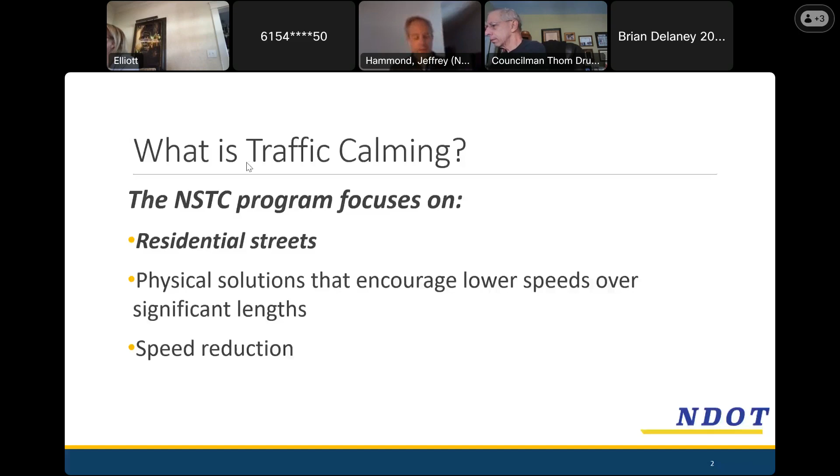We know that this is not the only way to slow traffic down, and we try to work in concert with a bigger objective, and that is some of these other E's. We call it an education aspect, whether that's a public service announcement or something like that. And we do have some tools that deal with education. I'll show you those in a second.

An enforcement approach - a lot of people will say, well, can't Metro just park a cruiser down here and write tickets, and that would help. And I agree, it would help, at least for the time that they're there. But we all know that MNPD is out there doing very important work and doesn't always have the resources to put to traffic enforcement. And that effectiveness kind of wanes over time - the more you see the cop is not there.

One of the reasons we focus on the engineering part - that's our part. That's the engineering, the infrastructure, the right of way. Those are things that NDOT controls and that we're able to bring about a change with. One of the reasons we like to point to about why we do this program in the first place, aside from just being a quality of life issue and sort of an inconvenience, is it really can have real safety benefits.

I don't know how much you walk on Leake Avenue. I know most of the streets, very often when someone applies for traffic calming, part of that reason is because they don't even feel safe walking down their own street, maybe even don't even feel safe walking it into your driveway to get the mail.

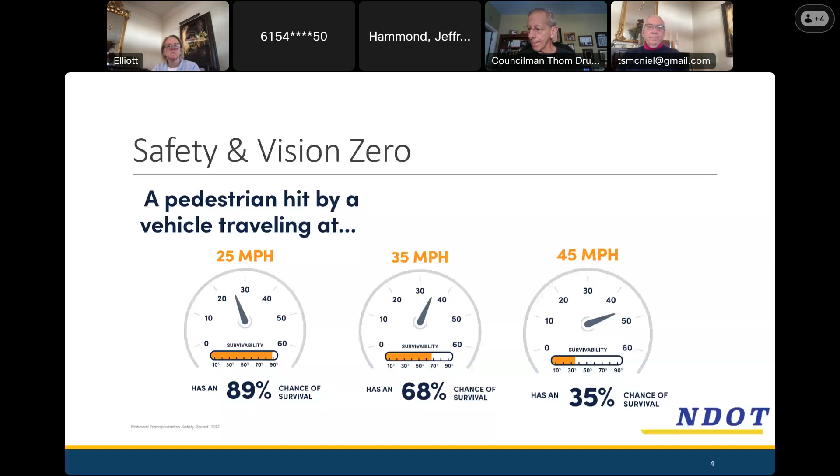There's a lot of people in Davidson County who are living with some of the inconvenience and some of the safety concerns that you all may have been. And so it's just a big number. To deal with that, we typically have been funded and working to do about 50 streets per year in 2 different application windows in the year. But in this past year, there was some surplus budget money, and council saw fit to allocate a portion of that to additional traffic calming projects.

So just in response to the overwhelming outcry for some of this work, this year we're doing 85 streets - still a small part of what is being requested, but that's a lot of neighborhoods to be working in. And so we're trying to expedite that project and get some of these projects on the ground as efficiently as possible.

Sometimes when we come to these meetings, people will say, well, can we have more stop signs, or certainly you'd like more sidewalks and those types of things. This program is pretty defined in terms of what we can offer, and we don't offer those types of things, but there is a way to go about requesting that. Those are very reasonable requests, and the best place to start those is Hub Nashville.

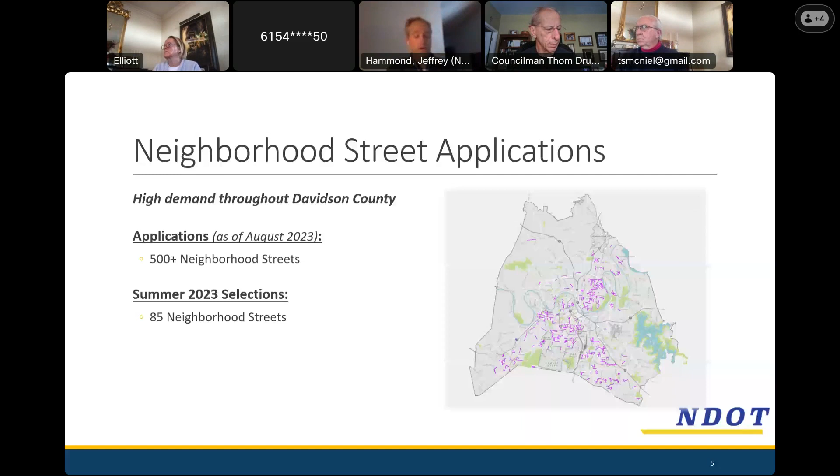If you're not familiar with it, it's a great resource for us residents of Davidson County. You go to hub.Nashville.gov. You can also pick up the phone, call 311 and talk to the operator there. This is not just transportation or NDOT requests - just about every metro department is represented there, and so it's a great place to log those requests. You get some feedback if they get it to the right people in the department, and it's a very efficient system. So we always like to plug that.

Back to how Leake Avenue got inducted into the program. This is the scoring system that we use. As I mentioned, it starts with the application request, and then we go out and actually take data on every one of those roads that are requested.

70% of the score comes from the type of data you'd probably expect: the amount of traffic on the road and the speed that traffic is moving. Altogether, that's 70% of our priority score.

The other 30% have to do with some of those other road users we were mentioning. If you have bike lanes on the street, your score actually goes up a little bit. You guys have sort of sidewalks, sort of not - you've got that asphalt path along a portion of Leake. So your score generally went up because you don't have good pedestrian accommodations compared to some of the other neighborhood streets we work with.

Your score also goes up if you have what we call trip destinations - are you close to a school, a park, transit service, or other shopping destinations that may warrant additional pedestrian use? You guys have Palmer Park right there, and that really helped boost your score because we recognize you have a nice attraction like that, people do want to walk to it, and we try to prioritize those streets because of those considerations.

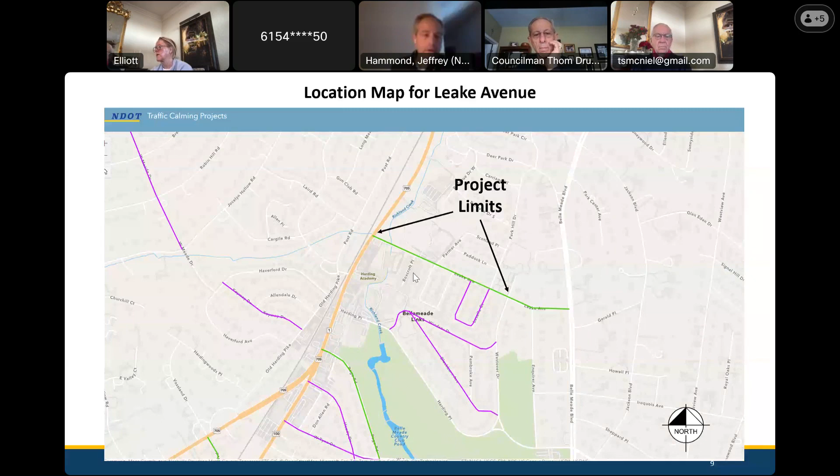I want to switch now and talk about some of the tools that we use, starting with this one I've referenced a couple times already: speed cushions. It has become the bread and butter and almost the sole tool that we use in this program, and that's for a couple of reasons.

They're a very known commodity to us. We order these from the same manufacturer for every street we do in Metro, so we know what we're getting. These are fabricated, not a site-built product — it's recycled rubber that they build to specifications, and we order those, they ship them, and our contractors bolt them down. That means they're very uniform and consistent. I can give you a street to go drive, and it will be the exact same product you're seeing on that street, so there's no question of what we're going to be receiving.

They hold up well and stay looking good. We've had some of these out for close to 10 years now, and they still look good and remain effective. We know how they track — there's not a lot of unknown about what we're going to be dealing with. We've been using these for a number of years now, so we're pretty comfortable with their performance in various aspects. Just a little information about what you're looking at here.

Speed cushions, as the name implies, are small and kind of modular — they look sort of like pillows laying down, I guess that's why they get that name — with a gap in between. That gap becomes important for some of our road users, our emergency responders who usually drive larger wheelbase vehicles. They can't straddle these, but they can get a little closer. The fact that there's a break between these cushions, as opposed to one big continuous piece across the road, which I'll show you in a minute, makes this our go-to product unless there's some very special circumstance — because of the lesser impact to emergency responders, fire trucks, ambulances, and so forth.

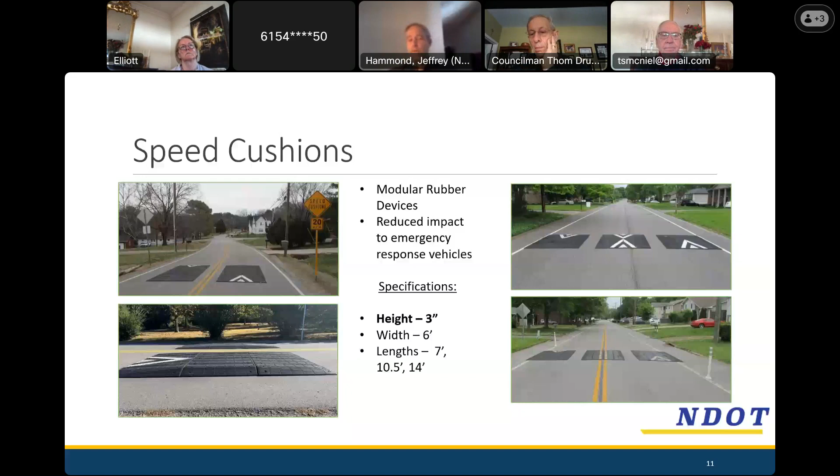We're not going to put these on a steep hill, or even a sharp curve. If there's a curve you're coming around, we don't put these in curves. And some streets have one driveway after the next, and we never want to block somebody's driveway with one of these. It's not dangerous, it's just kind of an inconvenience. Nobody wants to pull in and out of their driveway and have to navigate a speed cushion while doing that. So we steer clear of driveways, and sometimes it's very difficult to find a place where the density is much higher than it is in your neighborhood to situate those. In those kinds of cases, we'll supplement with a feedback sign instead of speed cushions.

So it helps. There's a little bit of before and after data on this as well. We're finding it does have a pretty good impact, especially in the short term. I think the jury's still out about the effectiveness of these over a longer term, as people get used to seeing it.

Yeah, Jeff, you just probably hit it as I was going to ask you a question, but from what I've heard from you and others, it's only a short-term solution. So if you have one up like on Davidson, people respect it for the first 6 months to a year, and after that, people forget about it. If that's correct?

Yeah, that's kind of our theory right now. We're still collecting some data. Some of these will actually record data for us, so we collect data and see if people seem to be abiding by it.

We're still collecting some of that data. People really go both ways. Some swear by them and say it absolutely helps. I can tell you it helps, I slow down every time I do it, so I assume other people do too. Other people see these and say what a waste, nobody pays attention to that. We hear both opinions from neighborhoods where these have gone in, so we're trying to let the data speak to it. But we can say that if we can put in a speed cushion, we would rather do it. We know it has an effect. This may or may not be a good supplement, but may not be a great total solution.

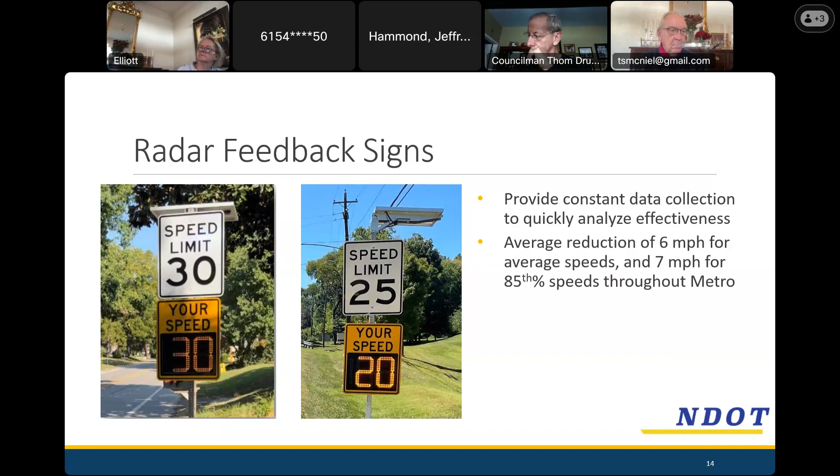Through the website you can request the deployment of one of those speed trailers. They pull it up and put it on the side of the road, and it does very much what the radar feedback sign does, but that's all it does. It's not taking anybody's picture, it's just feedback. It can be deployed, but it's not quick because Metro has about half a dozen of those they can put around the county at any one time, and the wait list is still months long, four to six months last time I checked.

So that is available, but we don't typically go out and put in a ground mount sign. That's a solar powered sign and it takes some time to do, so we don't typically use those as a temporary measure, but more as part of a permanent installation.

Jeff, can I ask a quick question, just for budgeting purposes? How much are those signs, and is NDOT going to request any more of them? I see we only have a half dozen. Sorry guys, I don't want to distract from this project, but if they're of value and we only have six, one of our top priorities is slowing down.

If you could send me a note on the cost and what you think would be of value, when we get through the budgeting process I can talk to Diane Alcorn and see if we can get a little bit more. I appreciate your help on that. For Leake, for example, if we could have put one in during the diversion process we went through for the summer, it could have been pretty valuable, but we had to get TDOT to help. Anyhow it was a mess, but having that would have been helpful, and I know we were short on them, so that would be helpful. I'll try to round that information up.

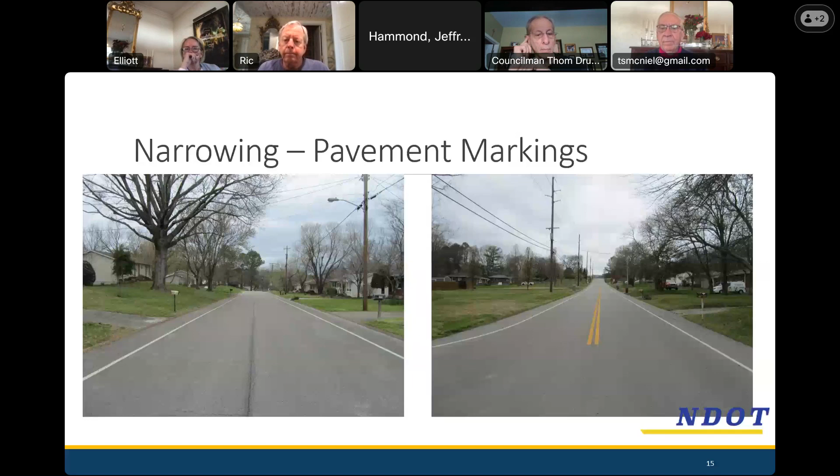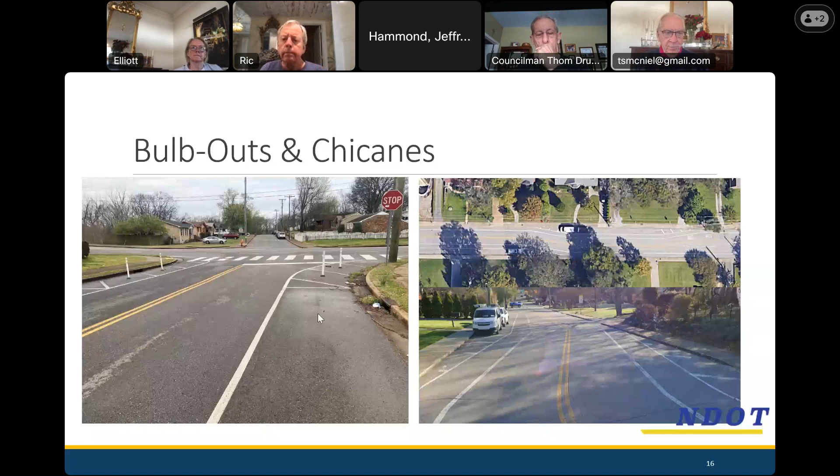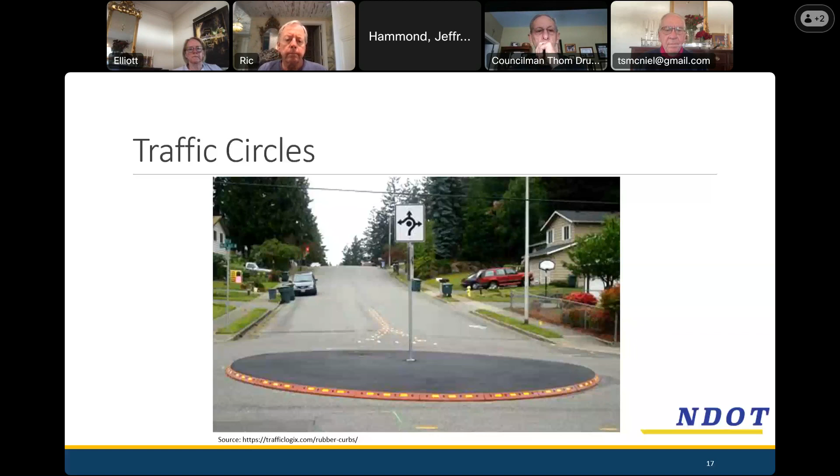Then we'll divide that by what we want the spacing to be. What we've found is if we can space these sets of speed cushions somewhere around 400 feet, 300 to 500 feet in an area like this, that gives us a really good slow progression of traffic. It's not so close together that it's obnoxious or overdone, pushing traffic to another street, but not so far apart that someone slows down for one set and then steps on the gas to get to the next. If we space them in this range, traffic will slow down for the first one and then stay slow because they see the next one coming, with no sense in speeding up just to get to it—giving a nice slow progression of traffic from one end to the other.

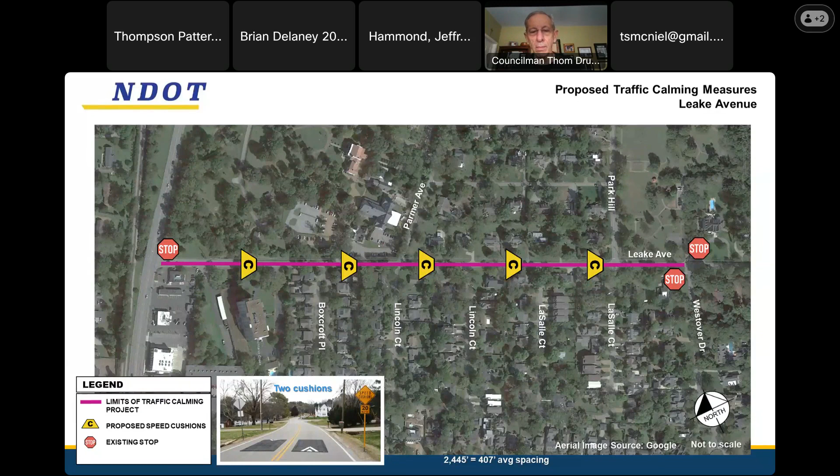Not for me, this is Rick Miller. I think probably one of the most important things is having one as near to Harding Pike as possible, because I live on Boxcroft, and I can assure you that by the time some cars get to Boxcroft, they're already doing 50 miles an hour. So stop them early. I'm looking at the layout right now on the overhead that you sent us, and those spacings look pretty good, where they are, in general. So to me, they do.

Okay, thanks Rick. I want to, as we're solidifying this and maybe not have a second meeting, make sure we've pursued every angle. Thanks.

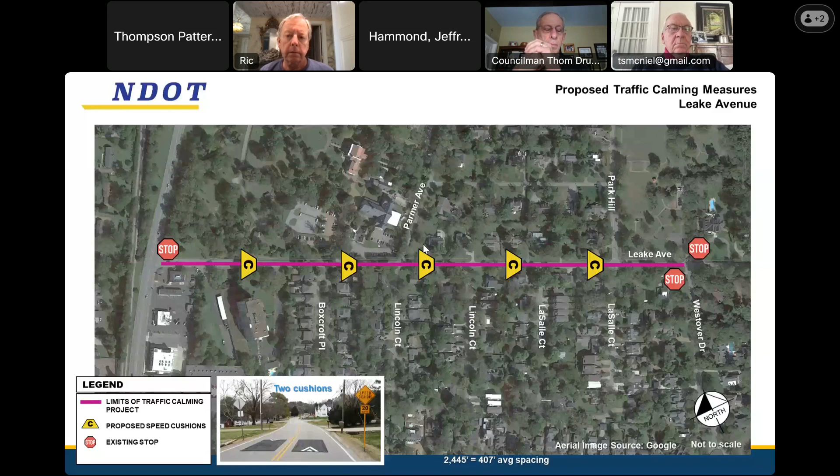Well, I want to talk just a minute about this, because if we did have a second meeting, this used to be a lot of what we talked about, so we want to cover it now. So once those design plans are posted, about the same time, we'll be mailing out these cards, much like the card if you got one for this meeting. I'll show you in a minute who we'll be sending this to.

If you're an eligible voter, we're going to send you one of these cards, and it's got some websites and QR codes to get you to websites. It's got a phone number. If someone gets a card and they're not comfortable doing this on the internet, they can pick up the phone and call someone and vote that way.

All it really asks you is your name and your address, and do you support the project or not. It does also link to those design plans, so you can see all of that, and you just vote yes or no. At the end of that 6-week period, we look at all of the responses. If you don't vote, you just don't count either way. We just look at the responses from the people that do vote. And if 66%, 2/3 of those vote yes, supportive of the project, then we'll move it forward at that point. If not, they won't.

The people that are eligible to vote, I guess this is everybody. This is a pretty small ballot, because this segment, y'all got a lot of frontage, so there's not a whole bunch of houses in this. The policy is that we send these ballots to the owners of the property who have a parcel that abuts the right of way of the street that we are traffic calming.

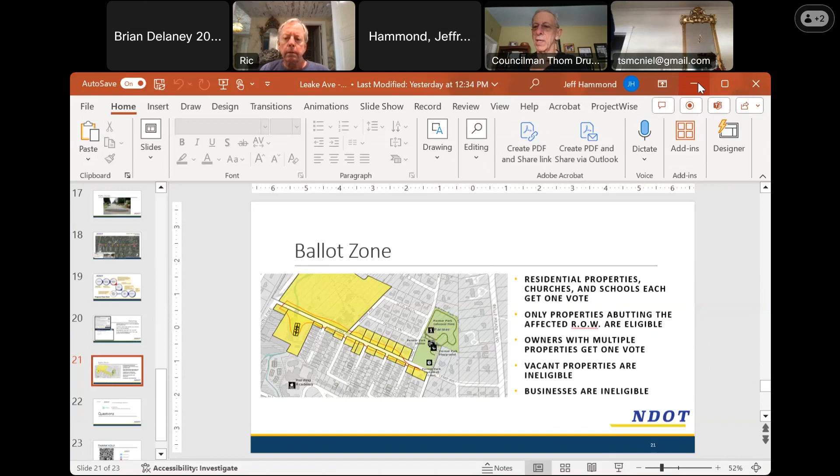Is there a policy issue, or what would it prevent us from probably doing that? You're saying to extend the vote to the side streets or something? The Lincoln Court in LaSalle. Yeah, there's 2 side streets, I think, if I'm not missing anybody, that probably are the ones that have - and Rick, he represents Boxcroft really well.

I think the people on the street are friends and neighbors of people on Leake, but by all means, having the opportunity to vote and say is probably a value. Maybe it was 30 or 40 houses, something like that. Is there a reason we wouldn't just extend the votes? Because again, it's everybody that is on LaSalle Lincoln. It's a U street, right? There's only one way to come out, and that's on Leake. And I know Thom and all you guys are on Leake, so you probably represent these guys well, but I do think, whether it changes things or not, just knowing that they have the opportunity to vote is important.

Yeah, I mean, from a feasibility standpoint, it's easy. I don't care if I send 10 postcards out or 110, it doesn't make any difference to us in terms of the mechanics of just doing it. That's easy. It's more of the policy, and the reason that policy is there is just to keep a lot of guesswork from who should get to vote and who shouldn't. It's kind of set, it's consistent. It doesn't set up some sort of an ongoing requirement that now we got to start allowing everybody who's got access to the road, even if it is sole access, required access to the road.

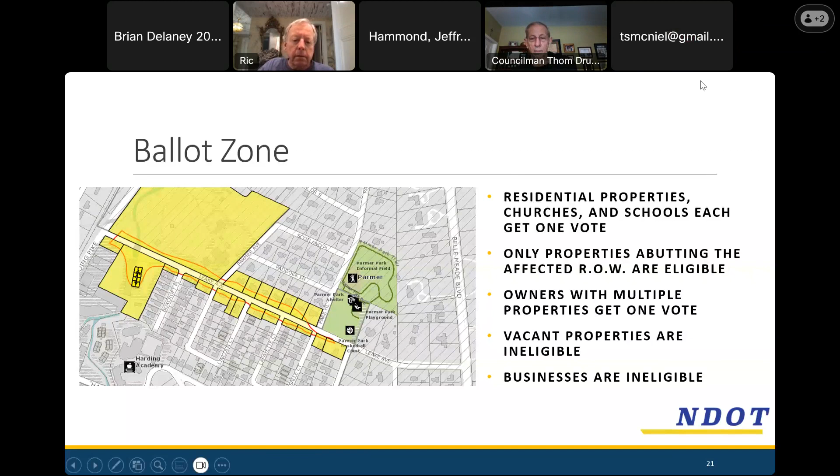I guess one comment on that - I'm not as keyed in on the sentiment of the people that live in the towers. Do we feel that they would be supportive of this, because they more or less control the vote given their outsized number? Yeah, and that goes back to you, Rick - you got a pulse of what's going on there.

Brian, just as an outside worst case scenario, Jeff, worst case scenario, if for some reason we don't get the 66% vote, what's that look like? I don't think that's going to happen, but I just want to make sure, since we're all on one call right now, I just want to make sure we have a backup and understanding.

Sure, so typically what happens if it does not pass is that we don't walk away from the project, but we do kind of downscale it. We assume in that what people are saying is they're not opposed to traffic calming necessarily, they're opposed to driving over speed cushions. And so what we would do is go back in and retool the project and take out those speed cushions, and you'd be left with something like the radar feedback signs or something like that.

It would just be a less aggressive, less intrusive type of project, and honestly probably not as effective, but that's how we deal with people's opposition to it. We assume that's not something the street is interested in, so we retool it to something a little more basic.

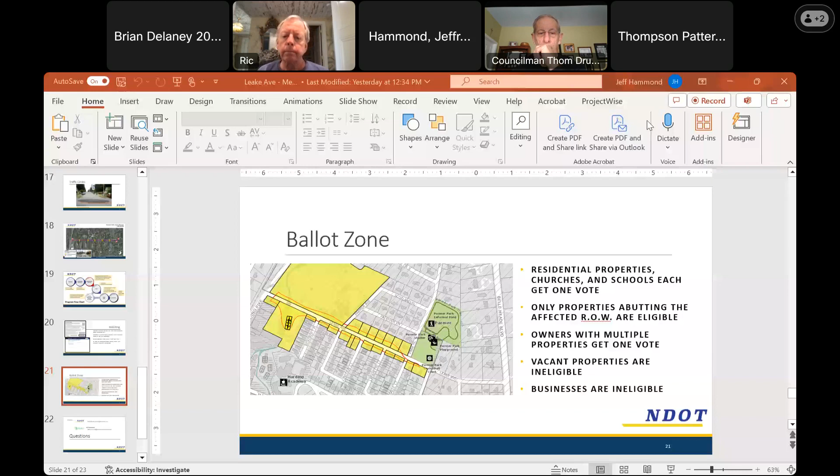Again, we really appreciate everyone coming out on a snowy Saturday morning. Thank you, Rick, for kind of spearheading organizing that with us, and Councilman, and all of you for taking your time, energy, and interest in this. Any final questions before we sign off for the day?

Rick, one last time, I just want to thank Jeff and Thom very much for all you all are doing. It's most appreciated, and I think we'll get to the finish line with this.